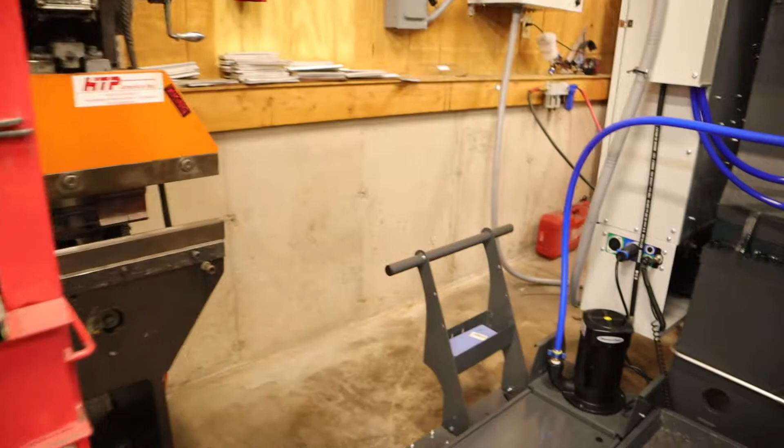Do do do do do. Do do do do do. Do do do do do do do do.

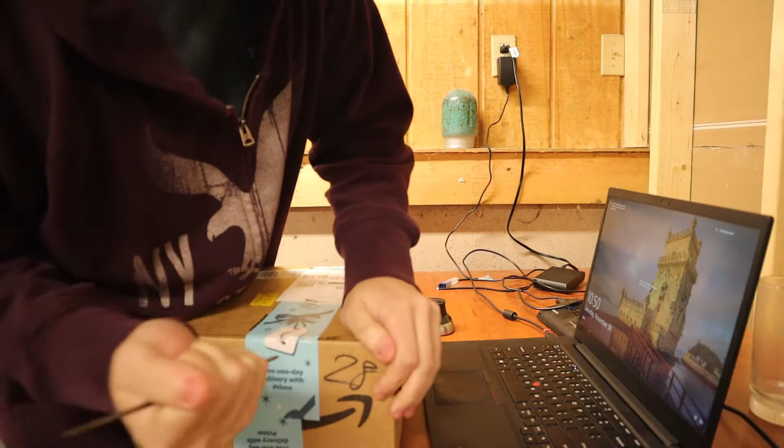Looks like we got some new PLA in red. Because I had some, but then we melted it in the oven trying to dry the water out of it. So that's a thing that happens.

So, welcome to the video. Today we'll be making a knife, the knife I've showed in other videos, and maybe it'll be completely done today. I mean, we'll cut it. We won't heat treat it because I don't have an oven, but my work does, so we will do that.

Not sure where I was going with this. Let's see. Okay, so this knife, we are going to cut this knife out of this material. This is S7 tool steel. It is incredibly hard even in its annealed state, and then when you heat treat it, it becomes insane.

Now the production ones are going to be made out of O1, because I would guess it's going to be better suited for the knife we're going to make. It's also cheaper. S7 tool steel is really expensive because it's like the daddy of all working steels, I guess. I don't know, that's just what Google says.

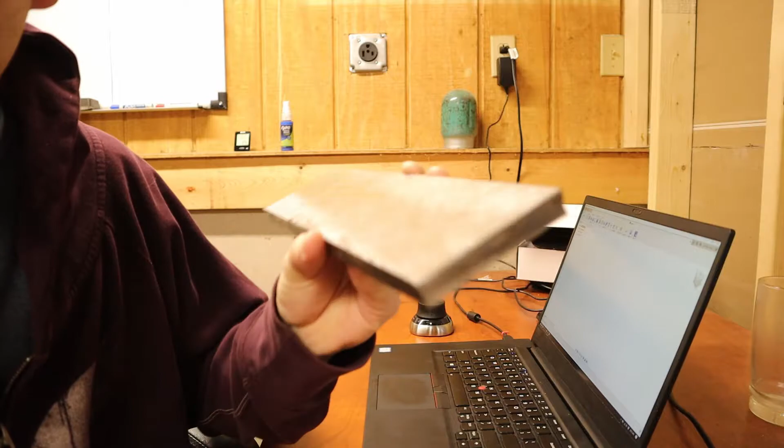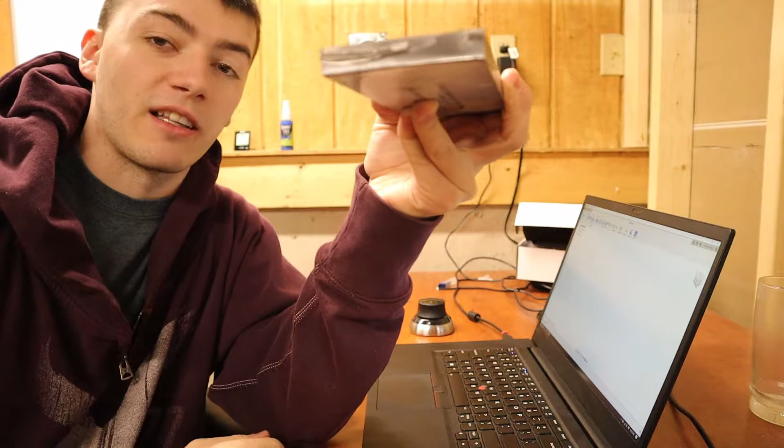It's way oversized, it's half an inch. So we literally have to cut down half an inch of this material to a quarter inch, which is the actual thickness. Like, a large waste of material. So that's unfortunate, but that is what's going to happen today.

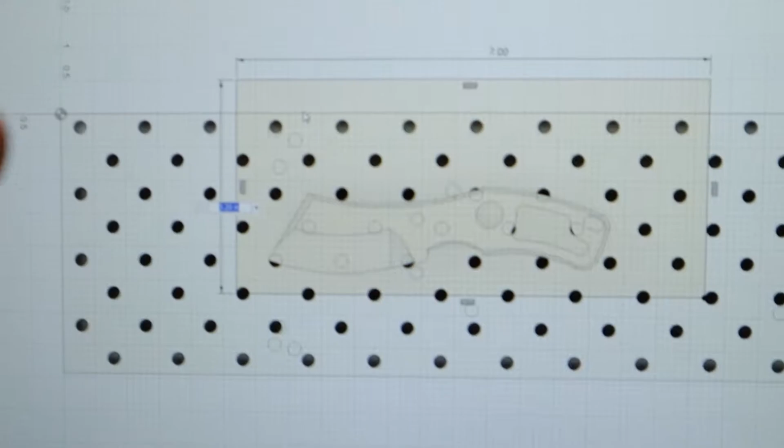So I got the actual knife design on top of the fixture plate that I have already built, and I'm gonna figure out the stock size. So what I'm gonna do is I have these quarter-inch bolts, I'm gonna drill some holes and put them on the end of the stock, and they're gonna thread into one of those holes on the fixture plate.

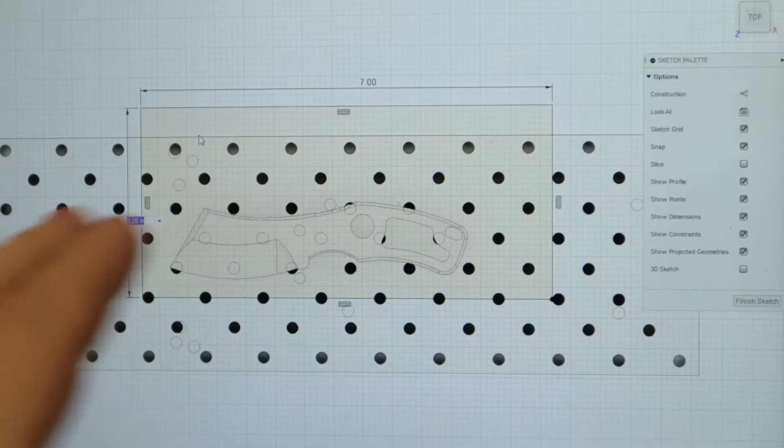And then we'll cut the knife out of the actual stock. So we obviously need enough room between the bolts and the thing that spins in the spindle, the cutter, to be able to cut one of these out. And we'll probably end up cutting two because of the size of the stock.

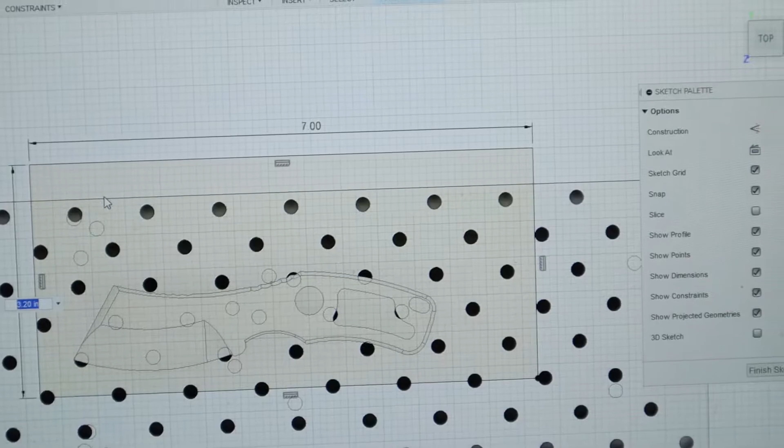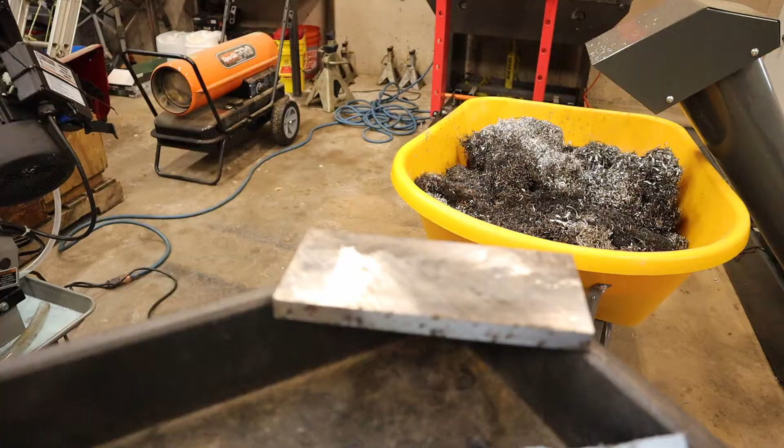So what we're going to do is I'm going to go cut a piece of stock to somewhere close to 7 inches. It doesn't need to be precise, but we need to be able to measure it after. So we're going to go with 7 inches. Yep. 7 inches on the money.

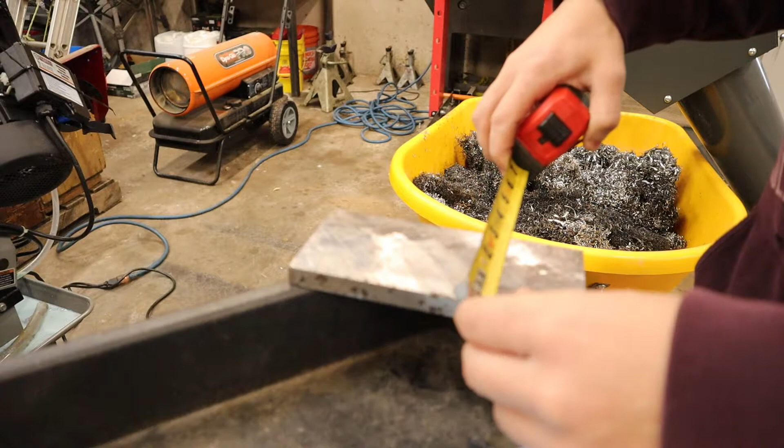So we got a 7-inch piece of stock, and then what looks like 3 1/8. So with that info, we're going to tell Fusion our stock size. Very close, but it doesn't need to be 100% accurate, like mic'd and everything.

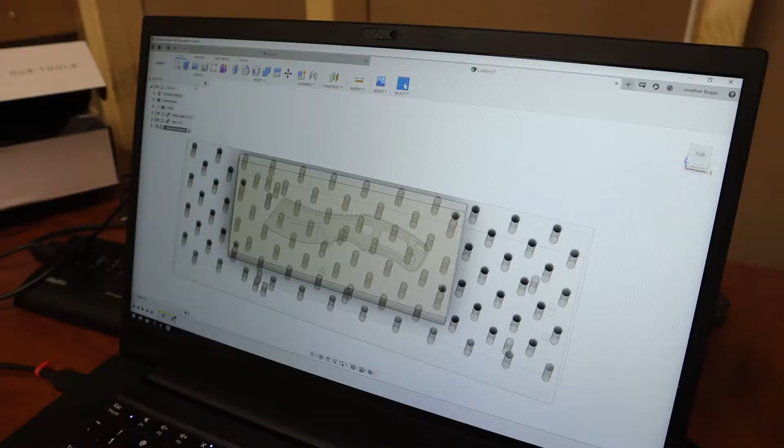So, okay, this is what I was talking about. So we have our stock, and I just placed the stock over our fixture plate, and then I projected the holes that lined up best with our stock, and it ends up being these 4 holes. Extrude to get our actual finished part, and here it is. This is the part, this is this part right here.

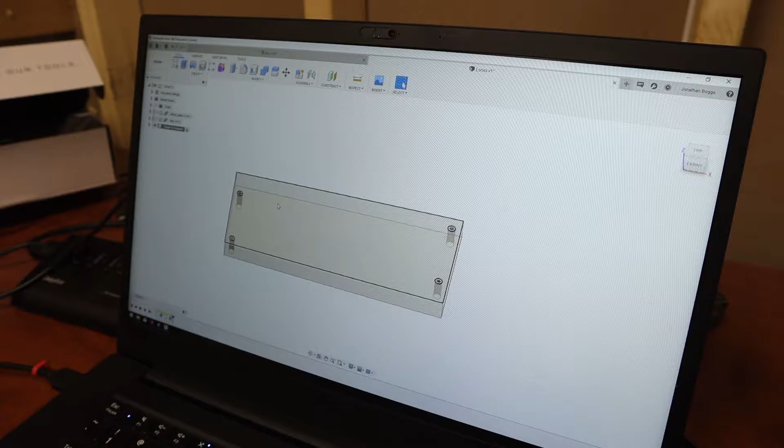We just saw cut. That's going to get faced for appearance on the backside when we flip the part over, and then holes drilled to actually be able to bolt down to the fixture.

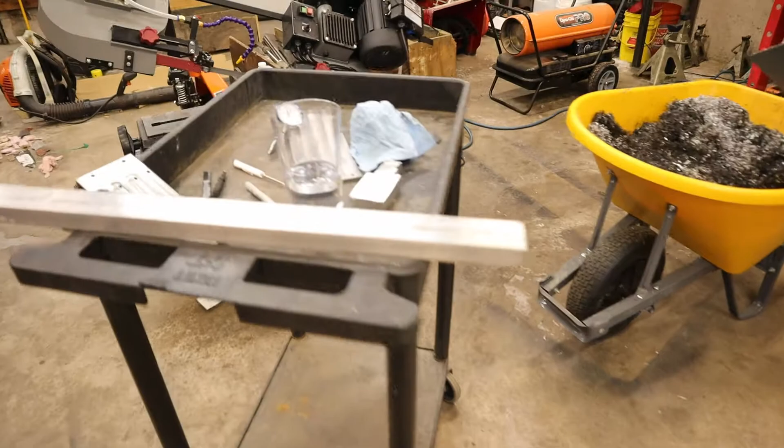Okay, I got the tool path all set up. We're going to face it, doing 1 inch cuts, so that's your step over, 1 inch for this.

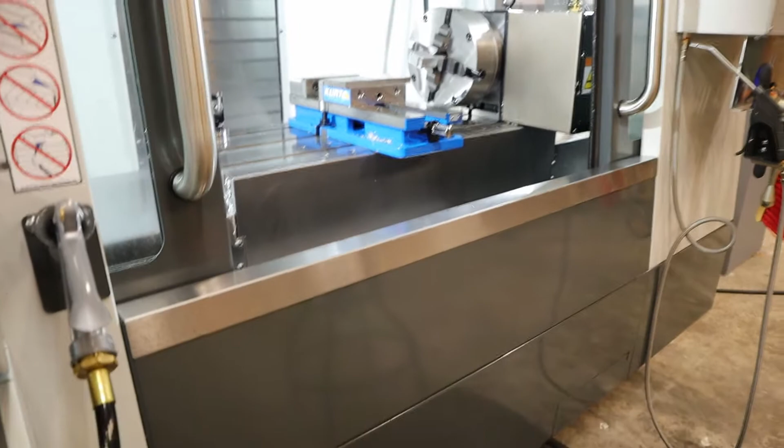I'm not entirely sure what strength tool steel this is, what treatment of S7 this is, so in my calculator I just said it was the hardest, and that makes our facing operation 12 minutes long based on our feeds and speeds.

That's a long time, and I'm also not going to be running coolant except for the drilling. Apparently on tool steels you don't want to run coolant, I don't really know if that matters for a face mill, but I know for end mills you shouldn't use coolant for tool steels because something to do with the heat doesn't leave in the chip, it actually stays with the cutter, and that dulls the cutter.

But let me take our 4-jaw out. I finally got the 4-jaw off.

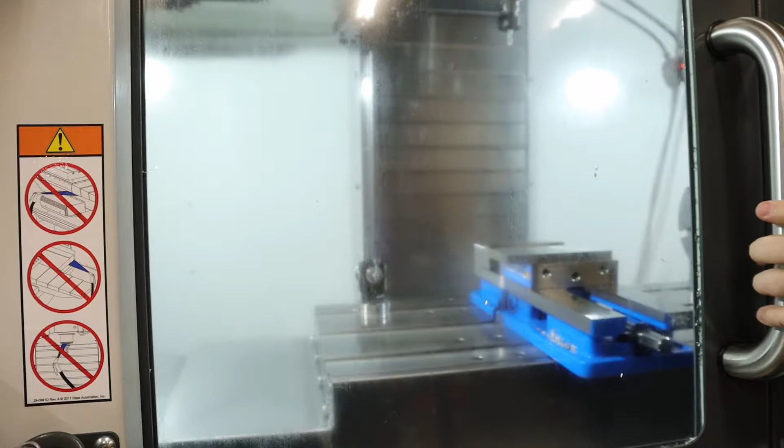Alright, I'm going to indicate the vise in just to make sure. We got our tenths indicator, let's see that.

Oh, good thing we checked. I don't know if you guys saw that, but it moved like 20 thou. That doesn't fit.

Alright guys, it's within 2/10 indicated in now, and before it was off by like 25 thou. So if you're going to do something really important like make knives, you need to make sure your stuff's straight.

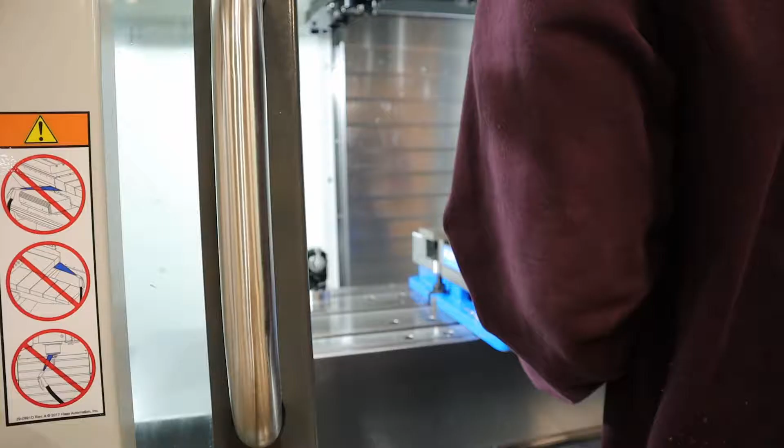Alright, good stuff. Now that that's nice and tight, let me post the program and get the probe out.

Okay, here goes. We got our face mill. I'm gonna not run coolant. And yeah, what could possibly go wrong?

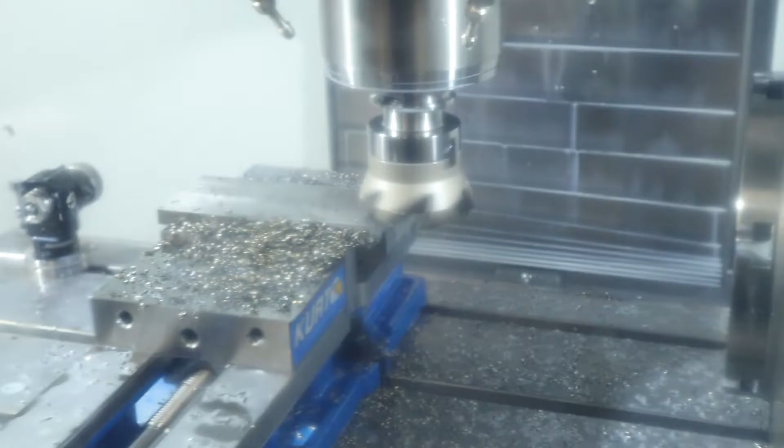Alright, that took forever. Next is to ram the center drill through it.

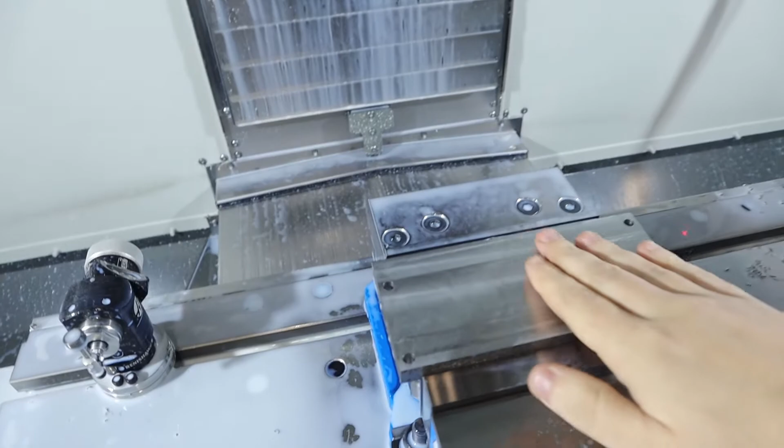Okay, now that that's stopped making noise, things are looking fantastic so far. The surface finish feels better than it looks. I know it doesn't look that good, but I thought I would tell you guys that.

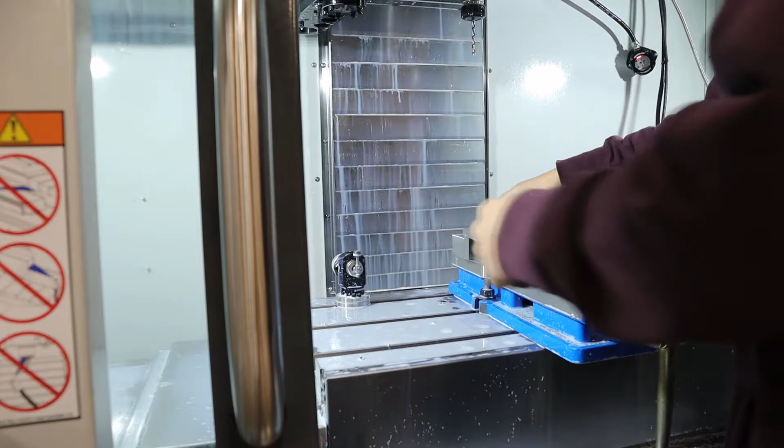So this will sit on that fixture plate that I'm about to show you, but I'm gonna file down these edges so she's nice and flat.

So that's what it looks like, plenty of 1/4-20 holes into her. Obviously you want to make sure there's nothing under it because you're relying on the flatness of that on top of the flatness of the thing you just made flat, so that when you contour the part out, it's actually flat and level.

It's a little tap. Nice little tap. Alright, then you take your part you just faced, put the pretty side on the bottom, because that'll become the bottom of our part.

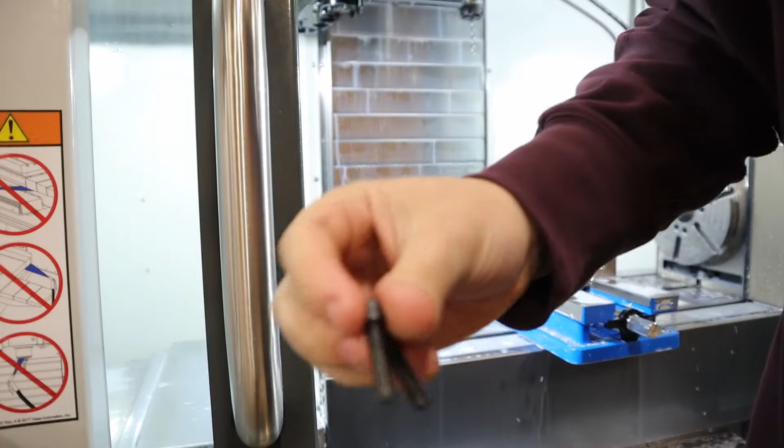Take some of your bolts, 1/4-20s. So that's what it looks like, all bolted down to their little fixture.

You can see they're not in line, but that's because we only followed the bolt pattern on here in Fusion. That makes it super easy and repeatable. This, all of it should be nice and straight.

We trammed the vise in. We know the height is perfect. Oh, I probably should have measured the height of the block.

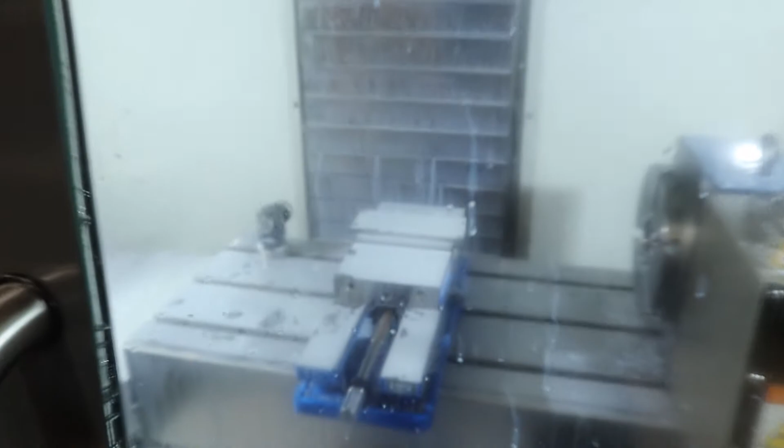Alright, so I had to do some adjusting. Our part's back in there on the parallels and off the fixture because the stock is too

wide, too thick, because the cutter can't cut around the bolt heads because that's like a whole inch on top. So what I'm going to do is channel out where the bolts are going to go, that way the bolts will sit much lower than the actual stock.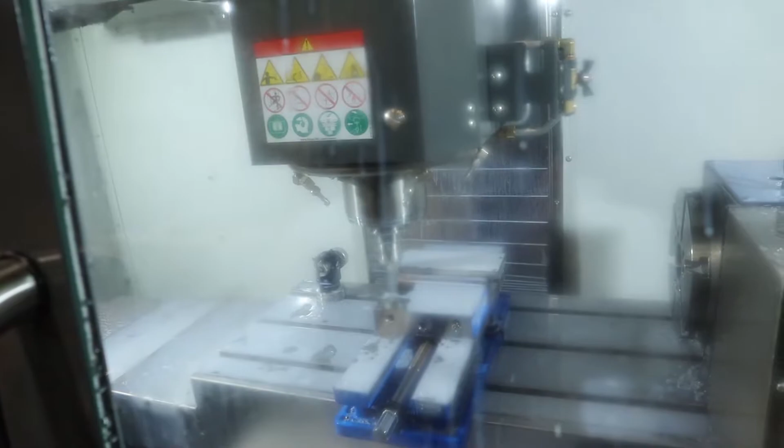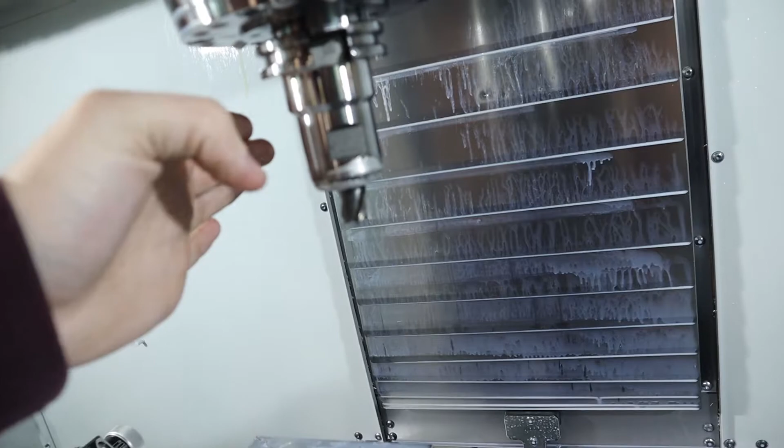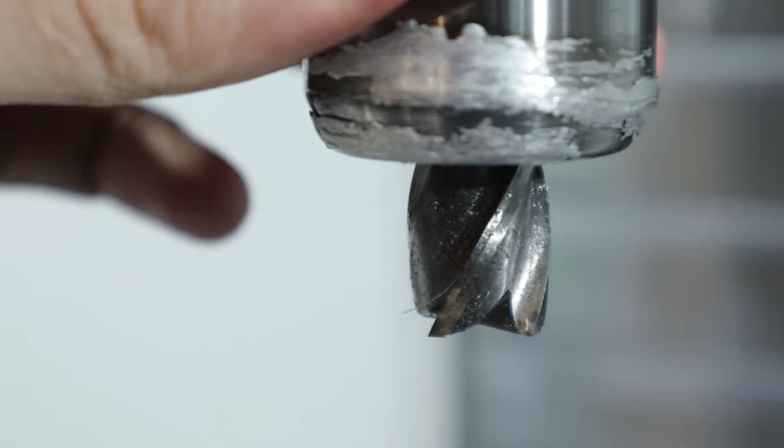Alright, I'm curious to see how the cutter looks after that. The tool's pretty warm, kind of hard to tell, but it still looks pretty sharp, which is good.

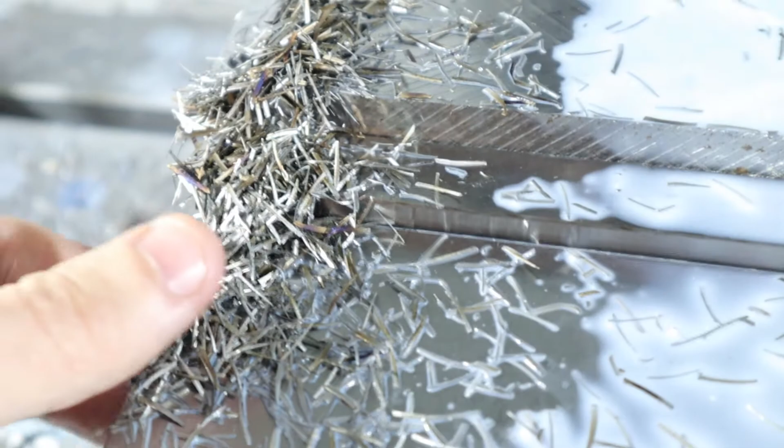These are the chips, I'm trying to see. I think they're a little thin. You can see this straw color, these straw colored chips are the heat being removed out of the cutter, which is a good thing, but some of them look like they're supposed to be darker, I'm not too sure.

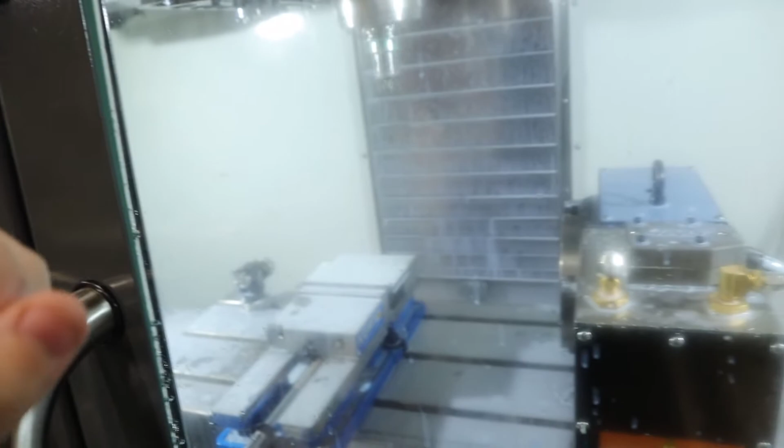Alright, so this one's 0.125 width of cut, that's 20% of the tool diameter, and the feed rate's a little lower, 5 inches a minute. Before it was like 6.7, and this makes the material removal rate much higher, so it actually cuts down our cycle time from 5-something minutes to 4 minutes. I'm curious to see how the chips look compared to the first adaptive we did on the left side. After this, it'll do a contour and just clean up the sides.

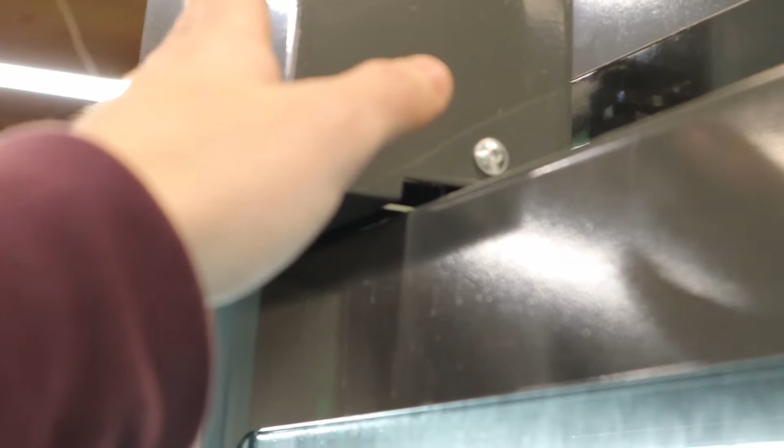Oh, I see some blue chips. Obviously more heat's being put into the chips than before, because it's a thicker cut. Oh yeah, definitely more blue chips in that pile.

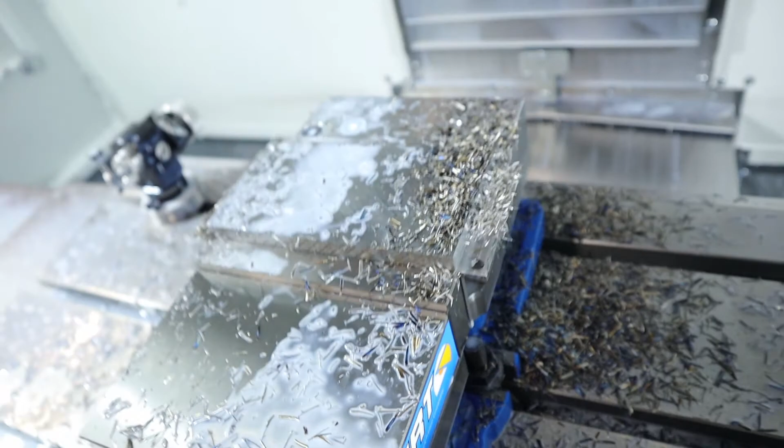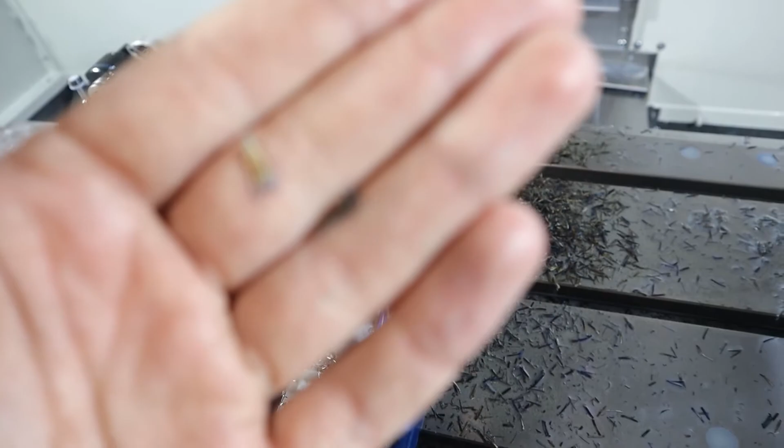Alright, here's what we got. So they're much more blue, like a significant portion is blue compared to the other side. And there's the thickness, so obviously a little thicker than the other side.

Tool's not that warm, that's not that long either, so that's cool. The smaller chips are from the contour.

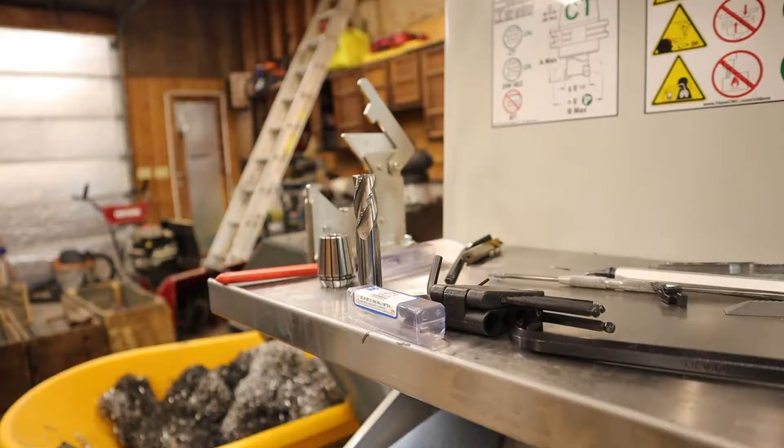I'm very curious to see how accurate everything is, just for process. This is supposed to be 135 in thickness from the bottom, so as long as I measured with the calipers correctly before, it should be close to 135. Yeah, that's not very close, I got 129, that's miles away from 135, 129 on the left side.

Alright, now I'm curious what the actual thickness of the part itself is. That's probably why, because the part is basically .499, and we said it was .504. Yeah, so that makes sense. Obviously we read it with the calipers wrong, because that's basically 4 to 5 thou away from our target. So what we need to do is tell Fusion what our actual part size is.

Alright, that took a while, but let's see, we got the first tool path. It's going to take like an hour and 40 minutes, and then I'll probably cut this video right after that, and continue working, but I'll post the first part as part of my effort to get more videos out more often. Oh boy.

Alright, I'm going to walk away while it's doing the first tool path, so hopefully I come back to some good news. But sometimes I'm just not that lucky.

Alright, so looking good, looking good, that only took an hour and a half. One of these little islands left, but not a big deal.

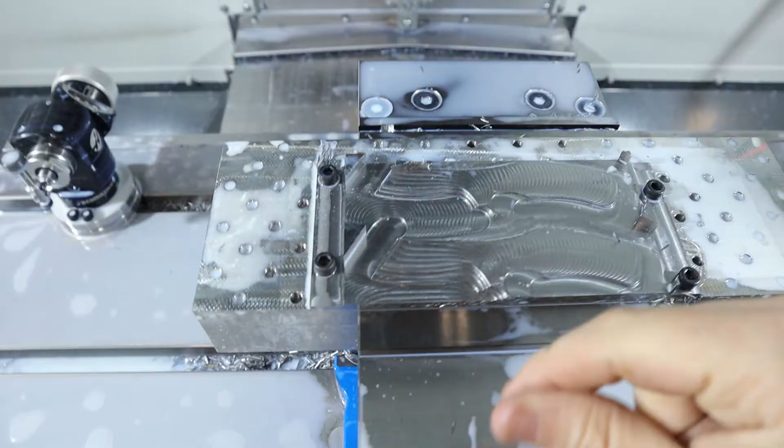So the next tool is tool 17. Oh man, I look tired. Alright, last tool path for this first stop, it's 4 hours long, it's actually the next day.

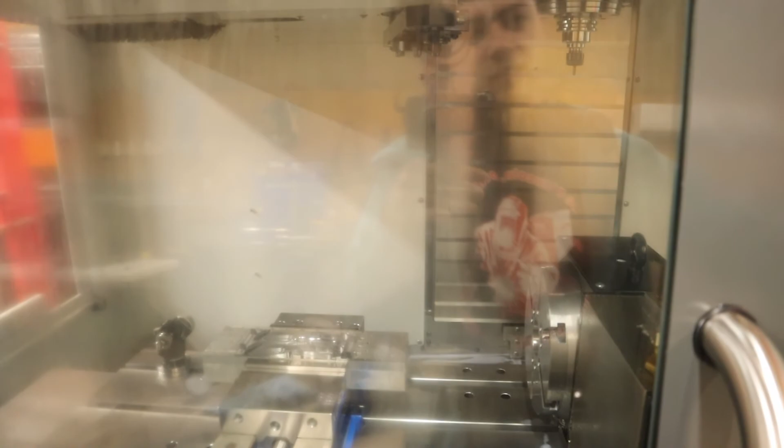Oh yeah, I forgot something. Ah, yes. Residential power. Amazing.